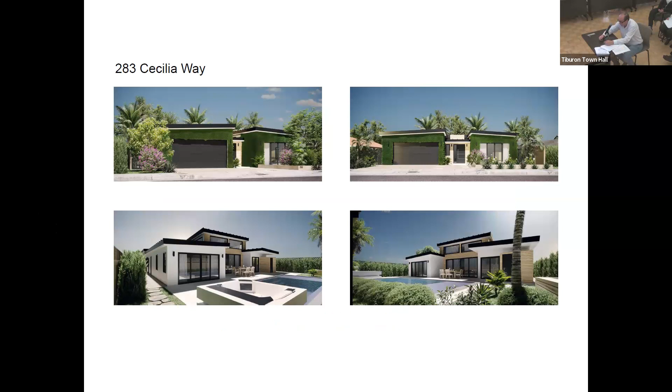At the last meeting there were basically two categories of concerns: one was neighbor concerns, and one were board concerns. So what we're going to try to do is address each of these concerns on an elevation by elevation basis. On June 1st, there were concerns about the shadow of the clerestory peak, which is right here.

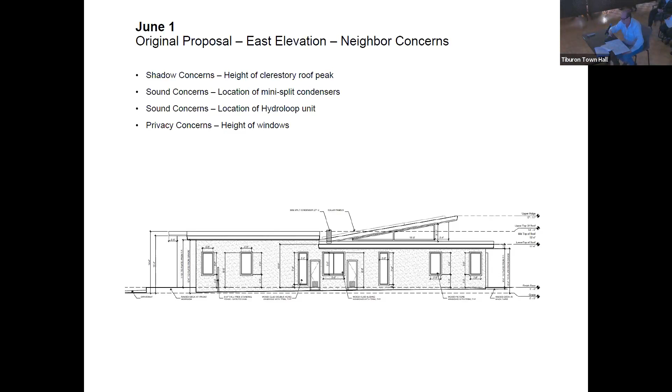The location of the mini split condensers, which is right in the middle - sorry, it's maybe easier over here - and the location of the Hydroloop unit, which was right here, and the height of our windows along the side of that elevation. So we did agree with the neighbors, and we reduced the clerestory peak from 17 foot 11 to 16 feet.

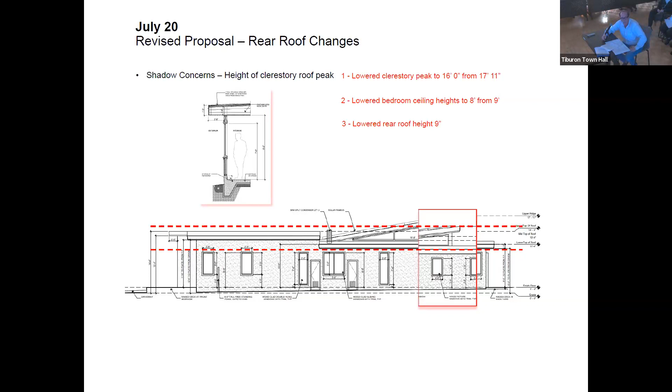If we did that, we'd lose our clerestory windows on the side of the peak, so we voluntarily lowered the roofs in the back 9 inches. We did look at trying to lower them 12 inches, but at the time we were considering using a truss system to do the roof system, and we couldn't go the full 12 inches because we needed that space to build the roof system as planned. So additional changes moving forward on that same elevation side.

There were sound concerns about the mini split condensers, sound concerns for the hydro loop unit, and the height of the windows. We moved the mini split to a location the neighbor had suggested, which was 7 feet 10 inches from the front eave, as illustrated right there.

We lowered the roof heights in the front by 9 inches, not 12, because since we lowered the other roofs 9 inches, lowering the front roofs by 12 would have exposed the sides of the hydro loop and mini split condensers by an additional 3 inches. We thought, since we were using the two roofs as an additional buffer for sound, that would be something they'd want. We lowered all the window heights as requested to 7 feet from 8 feet.

We removed the hydro loop closet from the side of the house. We removed the water heater closet from the side of the house, and we agreed that all the bathroom windows would have privacy glass.

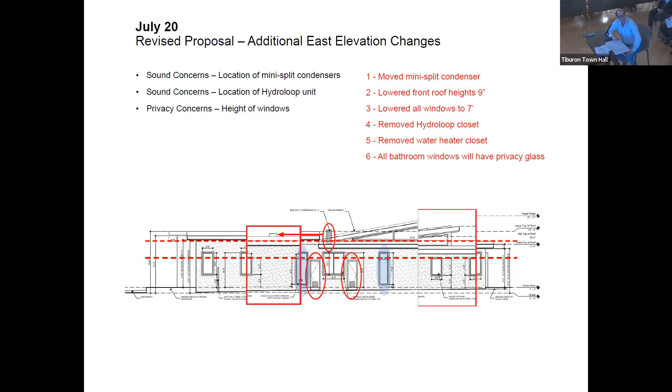So this is the final elevation of the east elevation as proposed today. There was also a discussion about the fence, and the neighbor at 287 said that with the lowered windows at 7 feet, they were satisfied with the 7-foot fence. So this is an illustration of the fence relative to the new house with the lowered windows.

We had the fence surveyed, so this is a surveyed fence line on the plans here, illustrated in yellow, and it pretty sufficiently covers most of the windows.

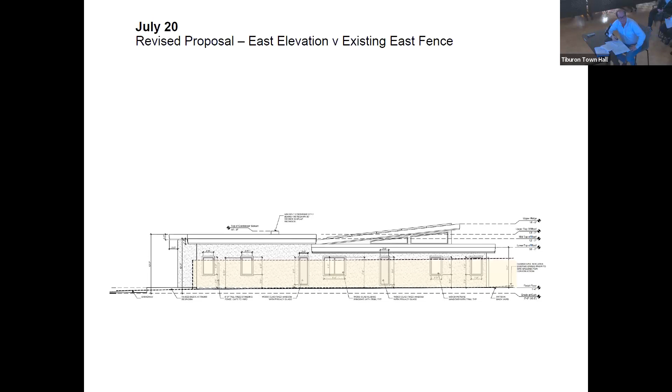There was a comment about the garage and why we need an 11-foot garage. We have an 11-foot garage in our current house right now, but we agreed to lower the garage roof from 11 to 10. We did move the hydro loop into a closet in the garage, in a metal cabinet here. It's not shown here, but it's actually going to be fixed to the wall. We're having a metal cabinet fabricated with insulation around the hydro loop unit.

We don't think it's very noisy, but noises come up a lot, so we're making sure that's going to be insulated. We're going to spend the money to do that. The solar battery units are going to be inside the garage, not on the outside as is most common. They're going to be right there.

As for the electric water heater, we've been putting a lot of things in the garage, and we just haven't figured out exactly where we're going to put the water heater. It's probably going to be an on-demand or some other kind of heater, but we don't know exactly where. It could be in one of our closets for all I know. In my previous house, we used to have it in a unit off the kitchen. So I just don't know where it's going to be right now.

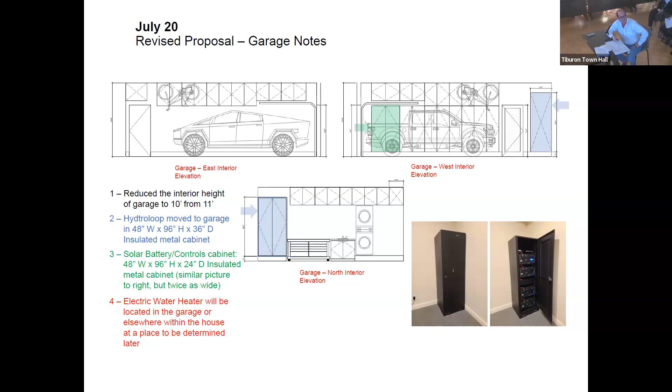We did reduce the entry height from 9 feet to 8 feet. And we talked about this last time, but we're going to have pendant lighting in the clerestory or great room, so there will be no direct light coming off the great room into our neighbors' yards.

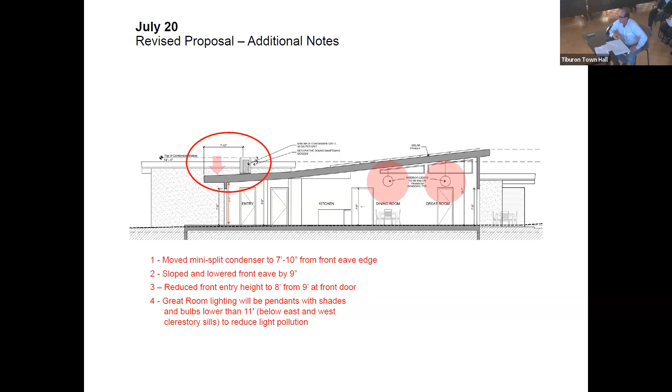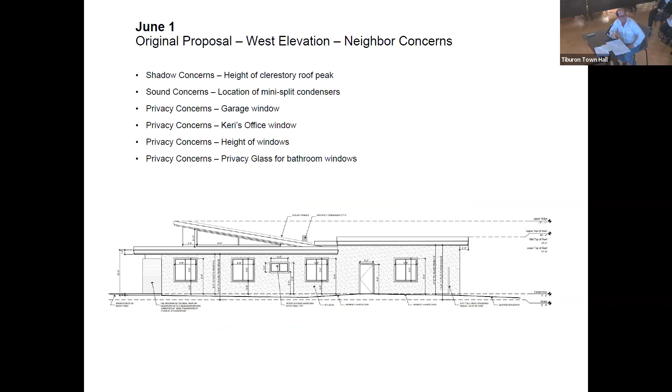So we have reduced the clerestory peak from 17 to 16 feet, as mentioned. The mini split's been moved up to 7 feet 10. We removed the garage window as requested by our neighbors. We reduced all the window heights to 7 feet instead of 8 feet, and we have installed privacy glass, noted on both the bathroom window and the glass window of the garage door, that area there.

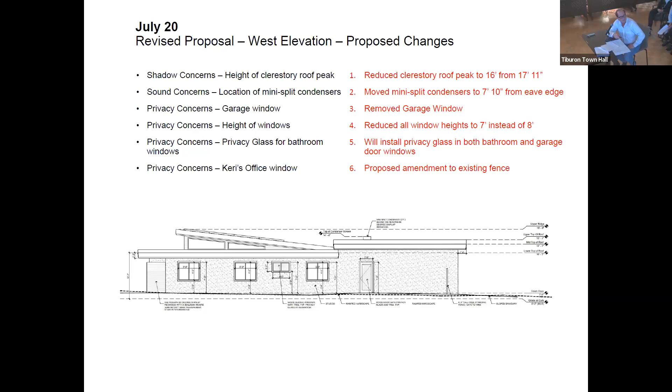We had also proposed an amendment to the fence to address Keri's office window issue. Likewise, we had the fence surveyed, and the current fence looks like this — this is the profile of the fence, and it covers most of the windows, whether we move forward with the fence additions or not.

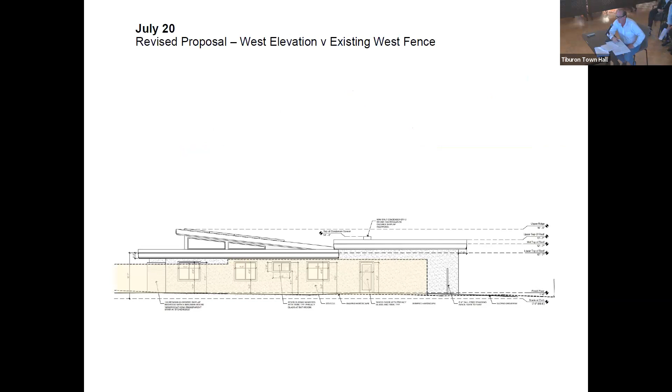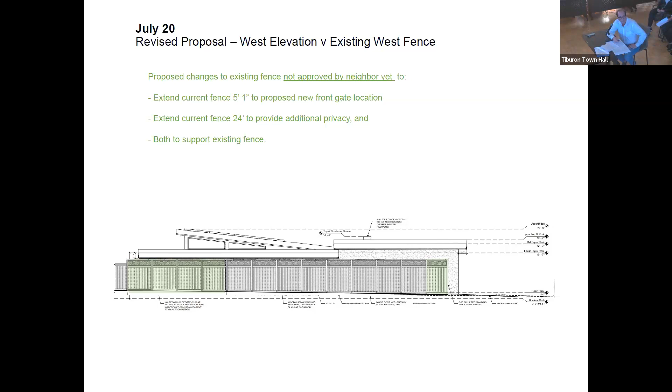So on the west elevation, this is what we had proposed to our neighbor: that we would add this 5 foot 1 inch section onto the front, and 24 feet to the back, because the neighbor mentioned that the current fence has been damaged or is in disrepair. Both the front and back portions would help stabilize it since we're going to use concrete foundations. But my understanding is that the petition for the fence has so far been waylaid because we don't have permission from our neighbor to do that.

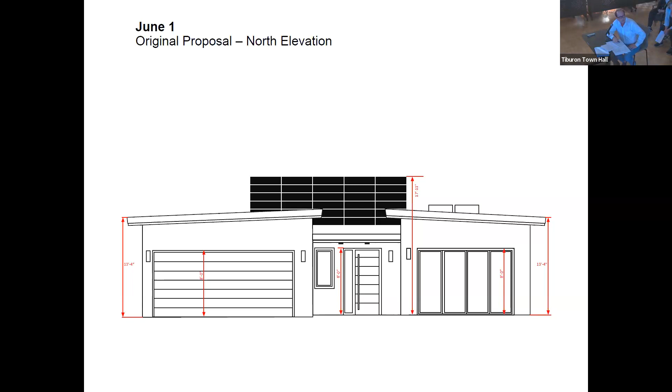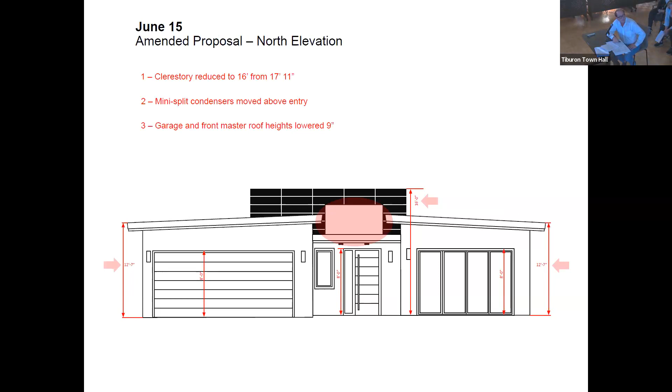On the front, this illustrates our original proposal: a 17-foot peak of the great room with solar panels in front, with 8-foot windows, 8-foot garage, and 8-foot front door. On June 15th, we intended to reduce the clerestory to 16 feet and moved the mini split condensers to the middle as recommended by our neighbors. We also reduced the garage and master roof heights by 9 inches, as mentioned previously.

After a number of comments before the June 15th hearing, we went back and looked at our numbers again. We decided to reduce all the doors, windows, and the garage door to 7 feet from 8 feet. I also mentioned the sloping of the front eave, so we lowered the front eave by 9 inches. And once again, the mini split condenser is moved to 7 feet 10 inches from the front eave, and because it's on that sloped roof, it's further nestled down by 4 inches.

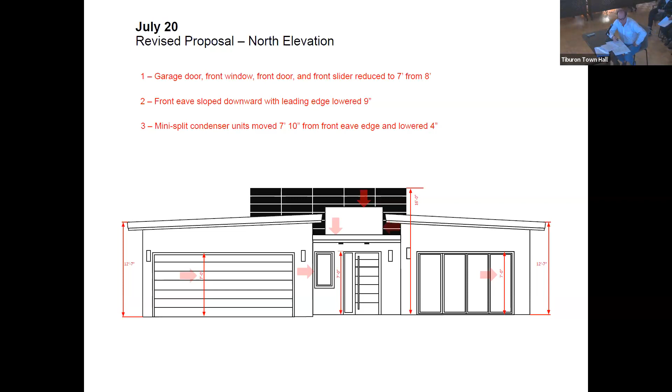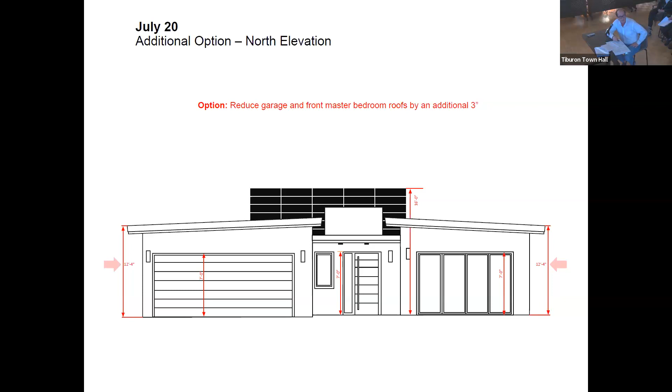Now, if the board believes we need to reduce the two roofs by 12 inches instead of the 9 inches as proposed, we're okay with that. Just understanding that by reducing that additional 3 inches, we're going to be exposing the mini split condenser by 3 inches on either side. But once again, we're agreeable to doing that.

As respects the front landscaping, we added a climbing fig because of Jim Mellott's comments about just another white building. We thought we might add some visual interest by having a climbing fig on the front garage and front master suite, which also breaks up the mass of the two portions of the building in front. But to be honest, my architect hates it, so we're not entirely sold on that necessarily, but it's one solution that we think addresses the concerns.

We added the Chilean mesquite tree in the front, several feet off the front. The intention was to provide immediate shade for the front master bedroom window and some privacy for that room. And then, at the neighbor's request, we removed the larger trees and bushes and landscaping on the southwest corner of the property, including that Japanese blueberry tree.

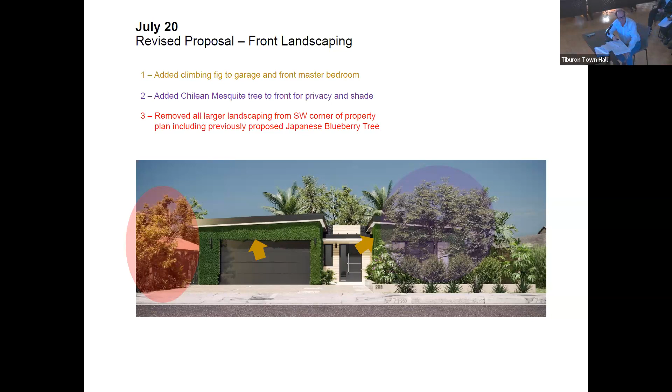With respect to the Chilean mesquite tree, this is where it is in the plan, and this is a picture of the tree we purchased. It's already allowable to have seating underneath the tree. When it matures, the foliage is going to be more lush, kind of like that. Right now it's getting shocked because it's been moved, but when we're ready to put it in, it's going to look beautiful, and it's going to be something people could sit under and enjoy.

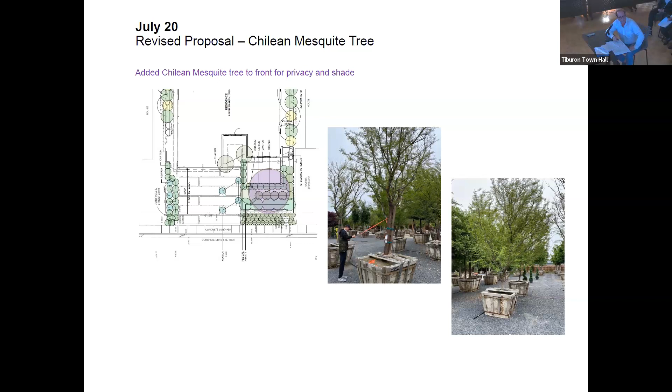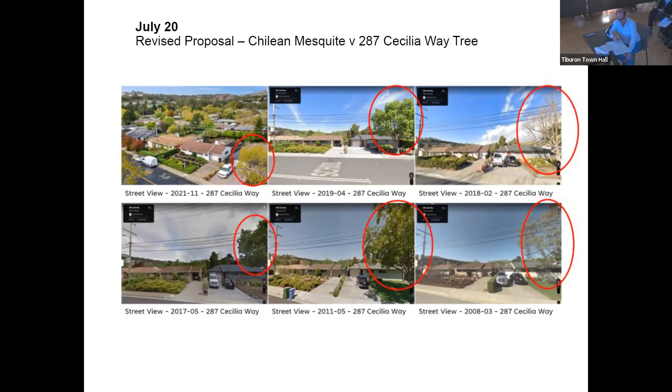There's been mention about the tree and the power lines, and honestly, we're concerned about that like anybody else. But our neighbor's tree at 287 Cecilia Way is immediately under the power lines and has been that way for at least 15 years, so if that was a major concern, I would have thought it would have been brought up some time ago. Still, we are concerned about it, and we picked a tree that, being pushed back from the street, should be sufficient and not touch the power line. So we feel pretty good there.

I have a little bit of a mea culpa here. I don't know who's responsible or whose fault it was, but Jim Fitzgerald brought up a concern about the SP 25 story pole and its height, and questioned it. We went back and looked really carefully, and found two major glaring errors. I don't know what professional did it or what have you, but as the owner of the property, I take full responsibility for it.

There were two errors. First, the elevation in the initial drawings showed the house raised up 1 foot 4 inches from the current grade, which was never the intention. Second, when the story pole diagram went to the engineer, they used 98.6, which was not the original intended number. The original number should have been 99.24.

Let's go over some important elevations. The current house floor is 100, roughly 8.95 feet versus the NAVD. Our intended finished floor is 100.57, roughly equivalent to these two elevations in the backyard. This is the finished floor at 100. The original intended place for our 16 inches was 99.24, in the front of the property. 98.6 exists somewhere in the street, and that's caused a lot of problems for a lot of people.

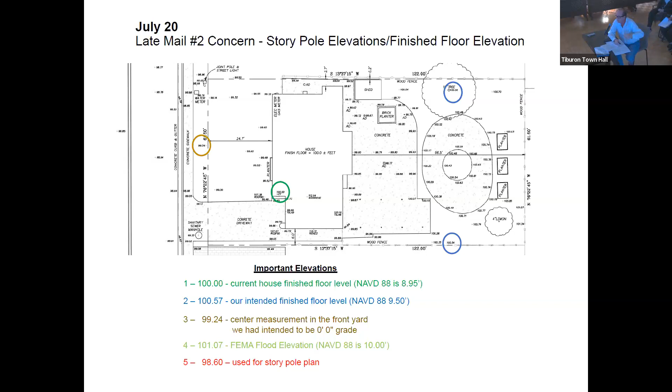The flood elevation, according to our soils person doing our stormwater management plan, is 10 feet. He wrote a letter saying that having it be 9 feet 6 inches, about 6 inches off that 10-foot level, is probably a sufficient compromise relative to flood.

So, mea culpa, we made a mistake, and I'm sorry about that, but our intention is to keep the finished floor at 100.57. I mentioned before that we couldn't lower the back roofs more than 9 inches because of the truss system we were going to use.

So we've abandoned the use of a truss system. We're probably going to stick frame the roof instead, and we're going to make up that elevation difference, basically 8 inches, by reducing the roof thickness and removing the exterior insulation we intended to put on top of the roof.

So we are going to build within the story poles that you saw, even though it's our mistake. We're not asking for it to be moved up or down. We're going to say, hey, this is our mistake, we'll own that mistake, and we'll build it to that level.

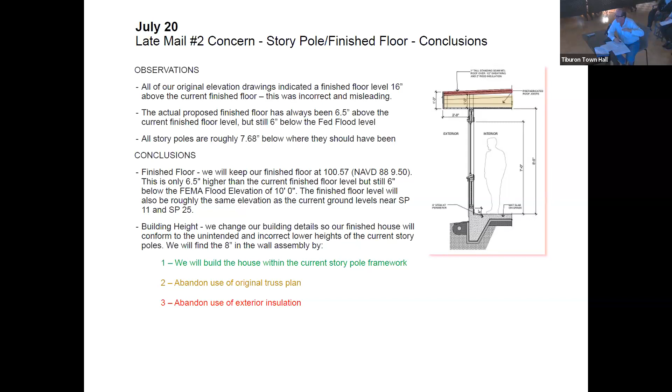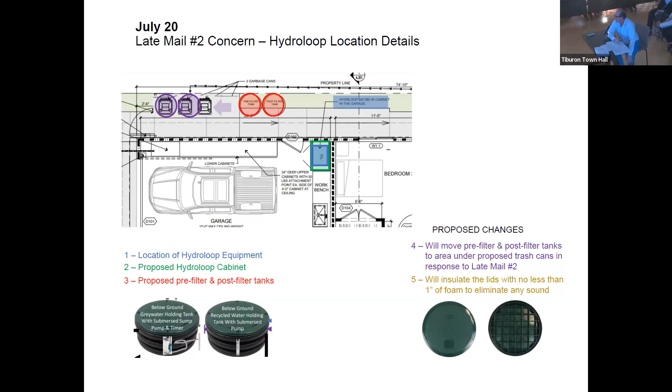So we're proposing moving those tanks under the trash cans, and we're going to insulate those lids with spray foam insulation so they're fully insulated, adding no less than 1 inch of insulation in those 2 lids. We looked at a concrete lid instead, but it won't seal as well as the plastic lids, so for sound, the plastic is actually going to be better, believe it or not.

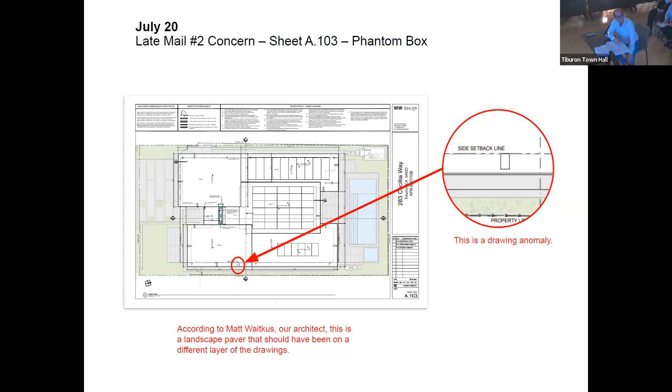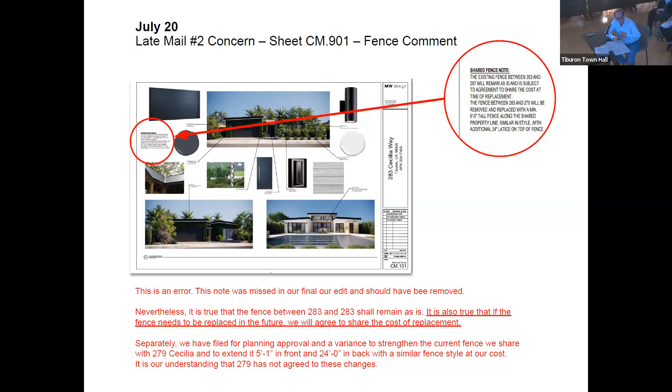And it's our understanding so far that the offer has not been accepted by their neighbor. There's approximately 4 minutes left.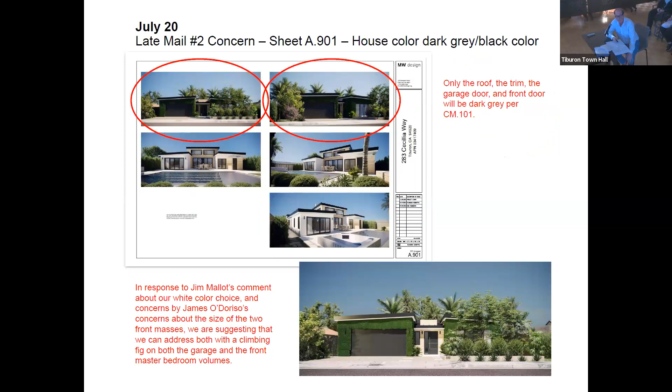Another late mail concern was the color of the house, suggesting it was black. It's not black, there's just a bad color from the image. It's the green for the plant, the foliage that we were talking about putting on for the climbing thing.

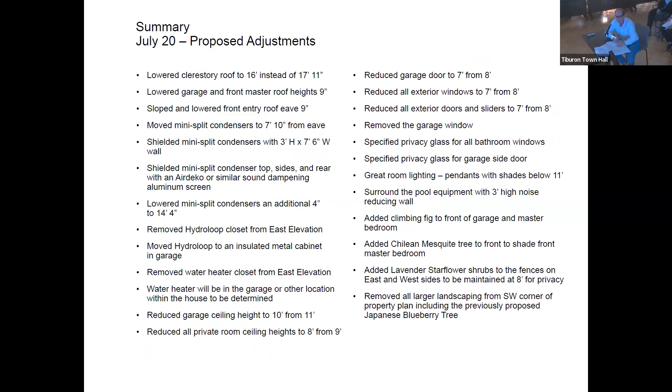In your packet there is also a summary of all the different changes that we've made, and a page talking about some of the things we tried to address that were board-mentioned concerns at the previous meeting: the color choice of the house, the necessity of an 11-foot interior garage, investigating lowering 12 inches. We talked about lowering the two roofs, and we can do that if necessary. We also added something about the privacy of the master bedroom in the front, and the Chilean tree was added for that purpose.

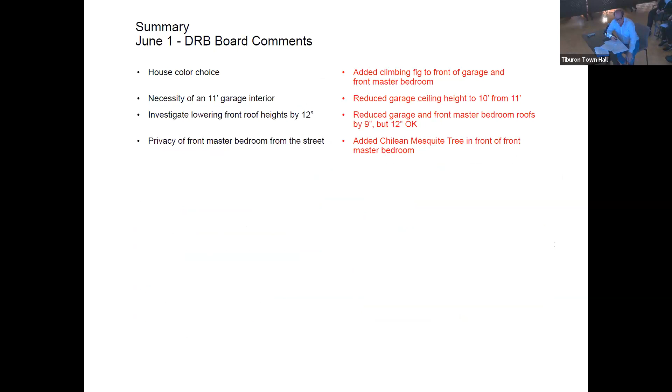Lastly, here's a summary of a bunch of different conditions. There's been a flurry of correspondence between us and the neighbors, and from the neighbors to the DRB, and we've tried to address a lot of those things tonight. We've been changing these plans over and over again to try to address neighbor concerns. Here's a summary of a number of different things we've talked about tonight that we would accept as conditions for approval. And with that, I close.

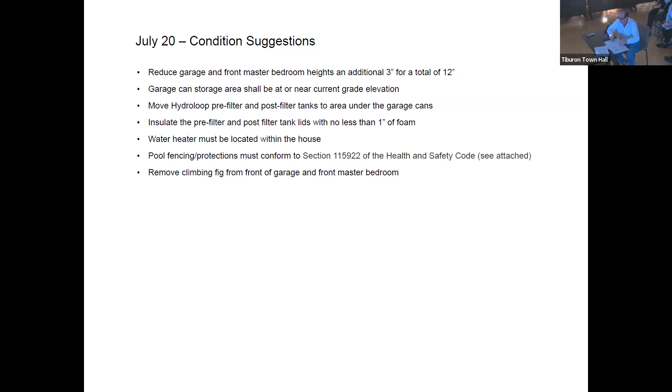All right, thank you. Any questions before we open it up to public?

Have a question, Jim? Yeah, what is the color now? Well, it's still a white house. I know you don't like white houses, but we added the climbing fig to the front. We've been debating whether it'd be the climbing fig or bougainvillea, which is another plant I really like.

What's wrong with coloring it with paint? Color with pink? I'm just not gonna do that, I'm sorry. You said paint, not pink. I mean, the houses on either side of us and in front of us are all colored differently. So I figure, hey, a white house is not out of place with a greenhouse on one side, a mauve house on the other side, and a greenhouse in front of us.

What color is the roof? Yeah, the roof is gonna be black. The top of the roof? Correct, we're gonna use a black stainless steel metal roof, and it's gonna have black trim on the sides. The main reason for that, as we mentioned previously, was to camouflage the solar panels on the roof, as well as the solar water panels on the other roof.

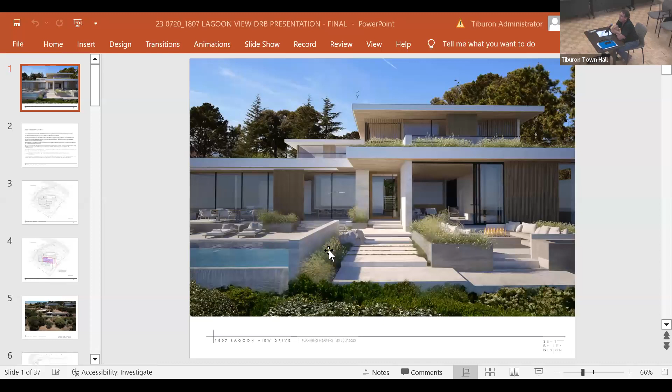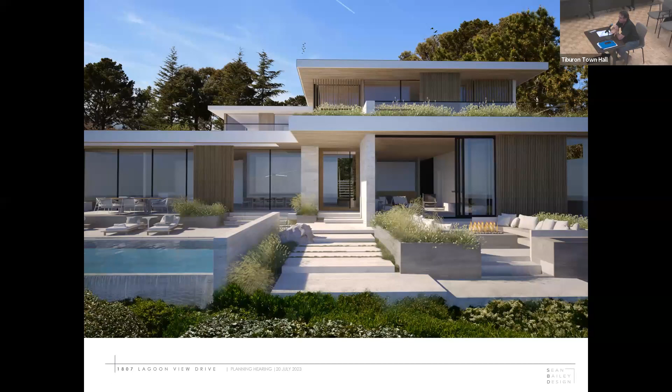My name is Jeff Pastor, and we purchased 1807 Lagoon View. It would be a year ago, September 25th or 26th. The first thing that I did after purchasing the property was go back to a design review board meeting that you had with the previous owner, Mr. Beniars, back in March of 22, so a little over a year ago.

And I watched from cover to cover about an hour and a half of that meeting. I don't know which of you were not on the board at the time, but there was a lot of pushback from neighbors, substantially regarding views, but other issues as well.

So what we did is I went and met with many, many neighbors, some of them multiple times, in order to first understand what their issues were and their concerns and see for myself. Next, we did some designs and talked with some of the neighbors who would be most affected by those and got their feedback and went back and redesigned again.

And then we redesigned again and were ready to submit back in about March of this year. And we had some neighbors who still were not content with what we had done. That's when we got the idea to take the garage and move it underneath the house in order to push the whole house back into the hillside further.

Did you all get to the house at all, or neighbors? Okay good, that'll save us a lot of time. In doing so, we created the need for a variance because now, while the house will be 23 and a half feet out of the ground as it exists today...

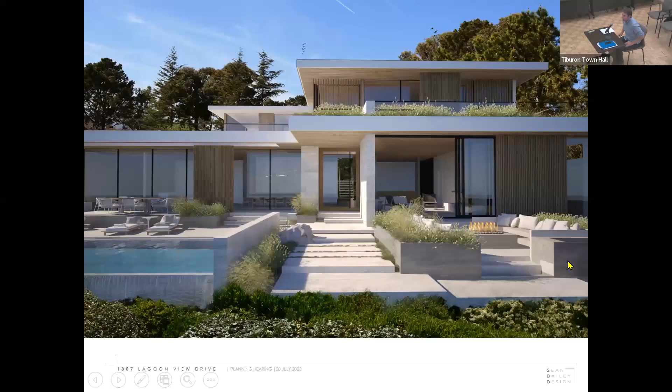I'm going to speed through the presentation, and I always like to thank Christy because she worked so hard to get us here. I brought this project before the board in March 2022. It was pretty clearly back to the drawing board, hearing from both the neighborhood and the board itself. I think the resounding hope was to push the house further to the rear yard because it preserves views for the neighbors uphill as well as the adjacent sides. I believe board member Mallot brought up a fundamental issue with the current driveway and garage—it took up a lot of real estate at the rear of the yard, and we had been clinging to keeping that. So this new design went away from that, as Jeff mentioned, by pushing the garage down.

You may need to turn it on the side. It is on. There we go. Okay, I'm going to skip through this one. Let's go. It's just going back and forth between the first two. Can I just say next slide to you guys? Okay, next slide please.

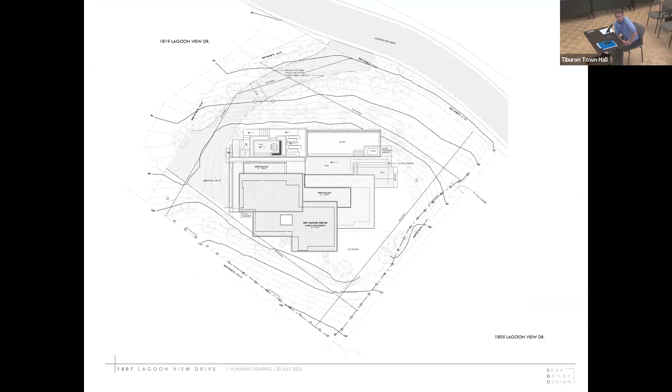The red envelope here represents the current existing house. The purple outline is what we had proposed back in March 2022, and the blue outline is the current proposed upper floor, so you can see how much we pushed it back.

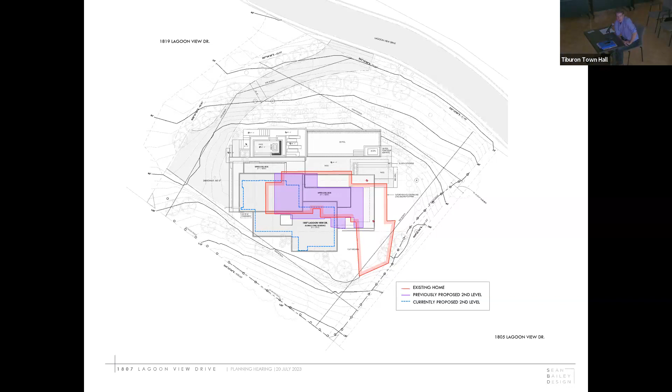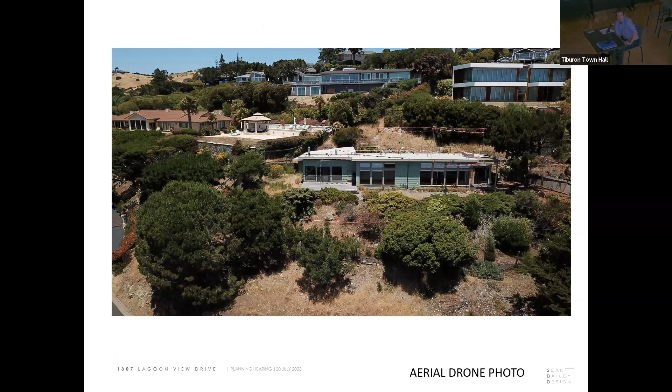A couple quick pictures of the story poles. I think hopefully these show that in context, it's very in keeping with the neighborhood fabric in terms of scale, and hopefully show how much the upper floor terraces back.

Again, the red represents the current house. This level more or less sits in the same area, but it is pushed back a little bit. This level has 1 bedroom, but primarily living spaces that all open up to the patio out front.

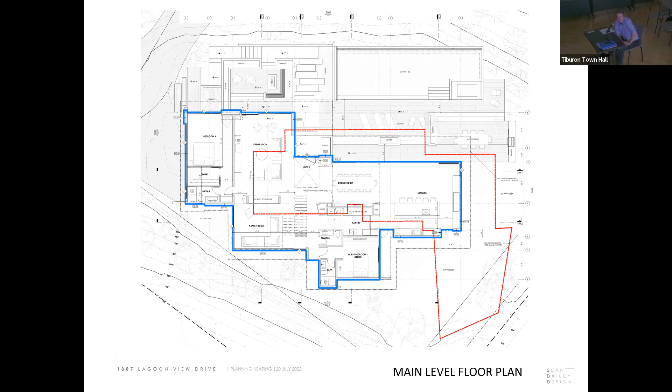Material palette—we're proposing a fiber cement fascia that would be a light gray, a warm gray. There are a couple travertine tile walls that sort of act as accents that bring in the entry, and then some Western red cedar vertical slat walls.

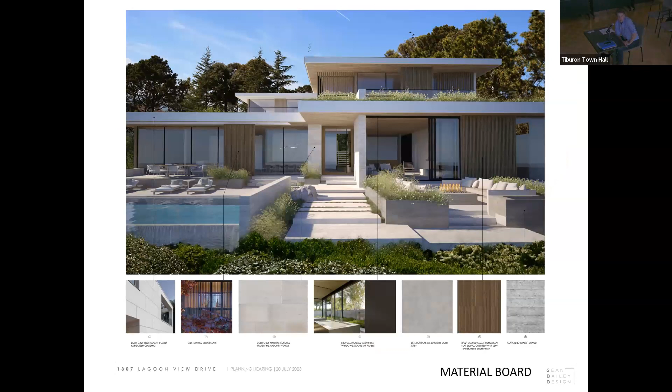I'm going to go next slide. Next slide, please.

Okay, so this is an important one. Jeff spoke on the height limit. We are asking for a variance, which I never like to do, but I think in this case it really allowed us to push the house back, which is a huge benefit to the neighbors. The red dashed line indicates natural grade, and you can see that even with the variance, it's a very small portion of the primary suite that sticks out of that building envelope. The ceiling heights are fairly modest—we're not asking for 16-foot ceilings here. And again, we're digging down to try to help get the overall height down.

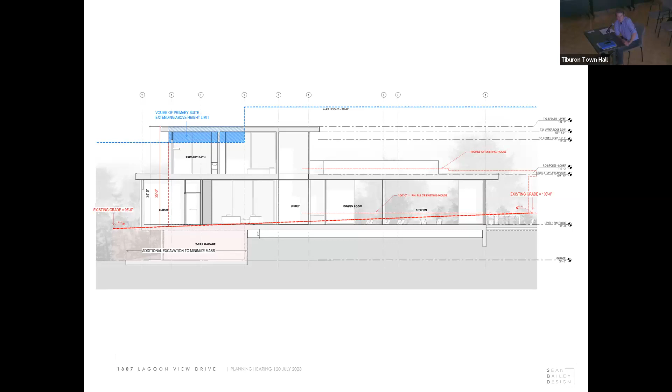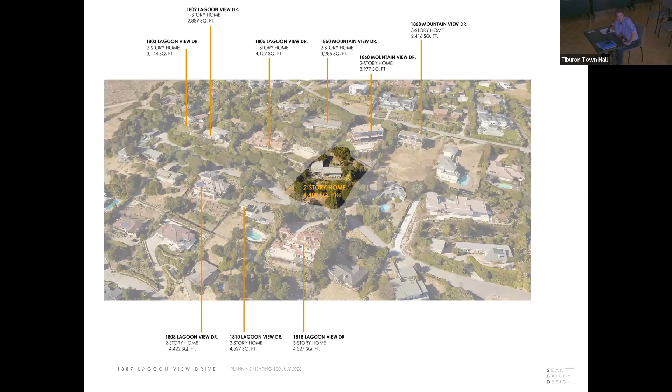Quickly here, this again just shows the neighborhood fabric—plenty of two-story homes of similar size, plenty of pools. You've got about 2 minutes to go. 2 minutes, okay good.

Okay, so 1805 Lagoon View, the Sherwoods—back in the hearing in 2022, to me, and I think to the board, they were the neighbors most affected by the proposed massing. And to Jeff's credit, he understood the process and understood what needed to be done. I believe we have tentatively struck a condition of approval with them.

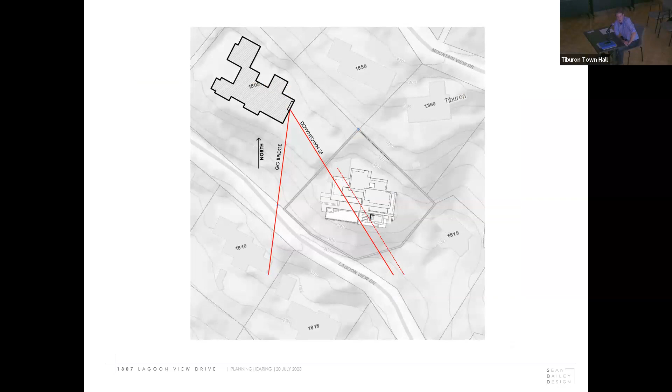But we essentially worked backwards from a view corridor. So we worked with their architect, Brad, and from the back bedroom there, we sat together and picked a view corridor and basically redesigned the whole project around that. So I believe we've gotten to an agreement point with them—you'll probably hear from them tonight. But to me, they were the neighbors that really had a legitimate concern about view blockage, and hopefully we've solved that.

Next slide, please. This shows the light blue was the old massing. You can see it has moved back almost 22 feet. I think it's not a push back 2 feet thing - this was a substantial change from what was previously presented.

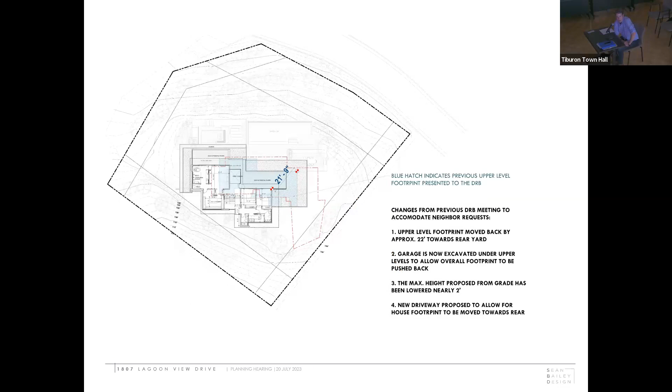Next slide, please. This is if the tentative agreement with the Sherwoods was to push it back 2 feet further at those two lower bedrooms. This is a quick plan that shows that Jeff is agreeable to. Next slide, please.

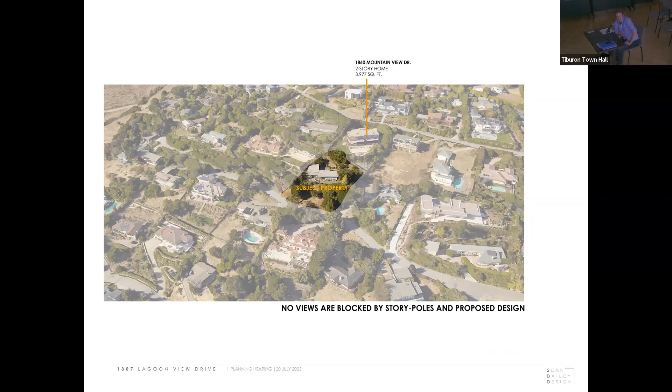1860 and 1850 Mountain View. I suspect you will hear from them. I don't want to dwell on this too much, but there are some photos from each of their properties we'll go through quickly here. Next slide, please.

This is 1860, the lower level. The house sits right behind those trees. There is no view blockage at all.

Next slide, please. The upper level, as Jeff mentioned, I have sympathy for them. There's construction right next to them, but I think it's important to distinguish - this is a roof blocking another roof. The water, the Golden Gate Bridge, the city skyline - there is zero blockage of that.

Next slide, please. Similar 1850, who you'll hear from, have similar concerns. Next slide - you can barely see it here, and again it's not taking out any water line. This is the lower level there. Next slide, please.

And then this again, it is a visible roof, but I think unfortunately that is part of living in this part of the neighborhood. You see roofs, and we're not proposing to block any water view at all. So with that, I'll throw it back to the board, and thank you guys for your time hearing us tonight.

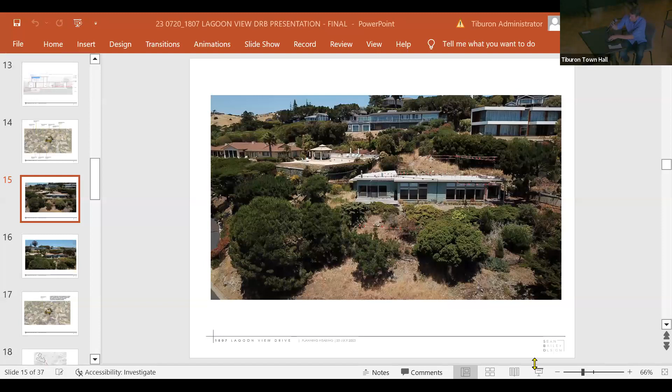I have a question about the roof material. Most of the houses above you are going to be looking down on your roof. And so the quality, color, and content of the roof materials is probably the most important thing visually they're going to see in the house. What is it?

I think if I get you to come back up to the microphone. I've got a question too, so let me just keep you up here for a second. So it's a PVC single-ply membrane roofing, and it's a medium gray color is what we're proposing. It's possible that gravel could be introduced on it as a condition. That would be something to ask Jeff, but I understand the concern. Darker the color, the better. The darker gravel is definitely an option. Darker membrane material. And gravel if you're going to put gravel on it, a darker color in general will go a long way. It would be obviously better off from a reflectivity standpoint for all your uphill neighbors. Okay, understood.

Any questions? That's it. Would you mind just walking us through real quick, ceiling heights, maybe starting with the garage going up, and then there's two right on the top level?

Sure. So garage is 8 feet, we wish it was more, but when you're digging down 8 feet, the whole entire main level, which is the living room, kitchen, dining, is 11'6". And then upstairs in the primary bedroom, that is 11 feet, and the other bedrooms are 8'8".

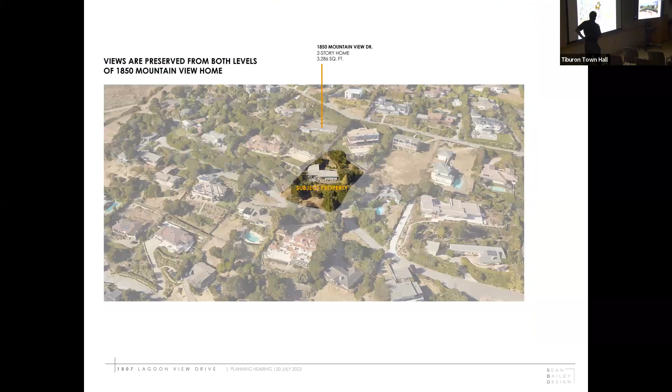Okay, all right. I think that will help you evaluate whether it's bulk and mass or just a roof. I don't believe anything you'd show us from uphill is the issue with regard to bulk and mass of the building. Okay, so from downhill then.

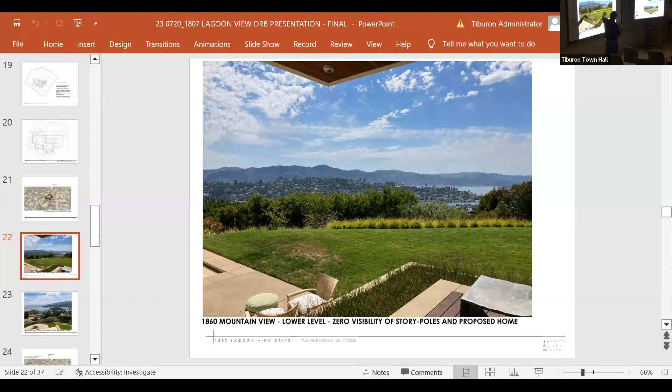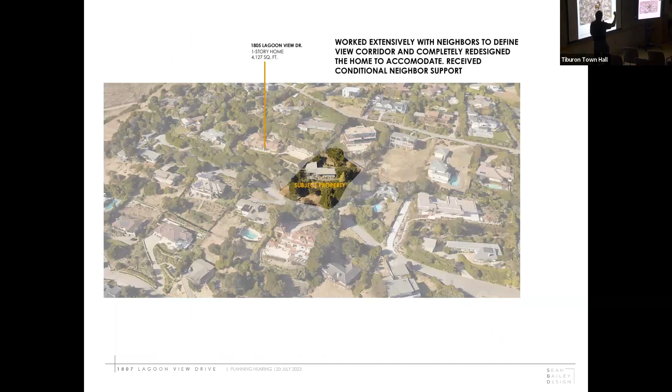Let's go back to the plans that show the story poles looking from Lagoon View from the drone. I'm sorry, the photo, Sean, the photo that showed the drone photos. Okay, hold it. Okay, so what we're looking at is here. Now, I don't know that you cannot see, even now with this, by the angle—you can't tell this from this photo. I apologize, but you probably can't see above or below this level.

So it's not any different from this house, this house, this house, as far as bulk and mass go. And in fact, when we put in—can you go to the landscape plan, please?

Go back right here. So here we have—okay, if you're looking from the street, nobody can see from here because these are tall oaks. Nobody can see from here because of these trees. This is high up above, and nobody can see from here because we have 17 24-inch box trees that are 10 feet tall now that I'm purchasing. They'll sit for 18 to 24 months, depending on when we can get started, before they go in. They'll be 12 to 14 feet lining the driveway. So you will not be able to see a thing from there.

And here are more of them. So those are 20, which I am purchasing, that you can't see up. In addition, there are oak trees here, and we're adding one for a neighbor between them, because there may be—it's not clear yet—a line of sight to a very small sliver of their pool area.

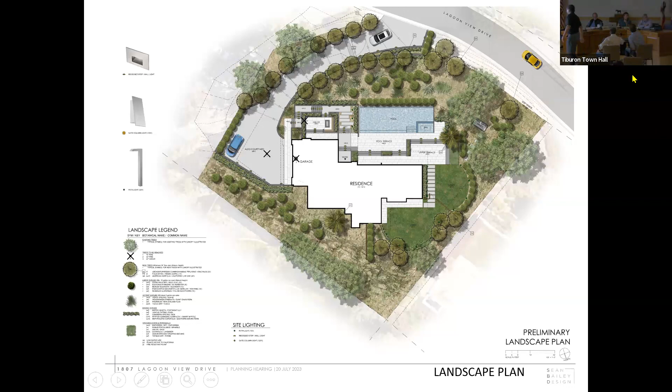Did we have a chance to see the Zack's photograph that was presented? Yes, sure, we can bring that up, and if we could just try to stay focused on just answering whatever questions the board has. I understand you have a project in front of you and you're going to make your statements—nothing wrong with that, I understand. I'm not saying you weren't. I'm just trying to keep us focused.

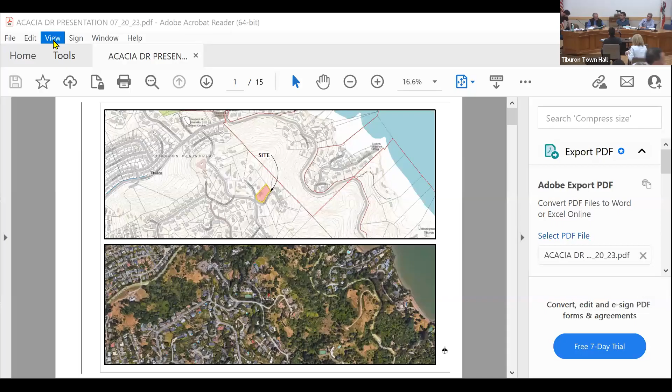Good evening. Good evening. My name is Jared Polsky, and I'm here with my associate Kathleen Heberman. We're Liz and Yale's architects, and we're also here with John Merton, our landscape architect, and Glenn Dirth, our civil engineer.

We could go through the slides, they're really part of your package. First of all, we're not asking for any variances. No setbacks, no height limit, no floor area, no coverage variances, and the house is designed to current planning codes.

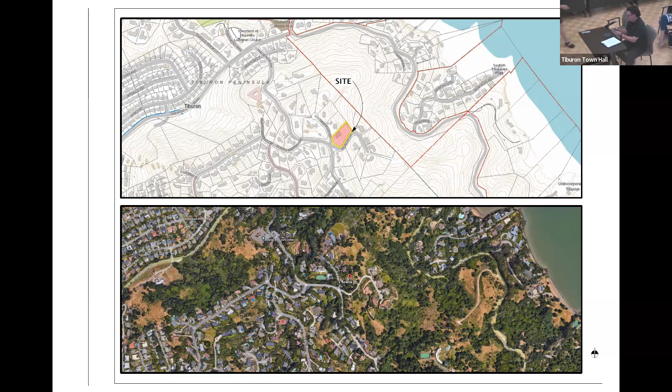Maybe we could look at the 3D. Can I move the clicker? There, and maybe you can try if it works. Which way? Oh, back, but makes no sense. This down arrow, that goes actually forward. Okay.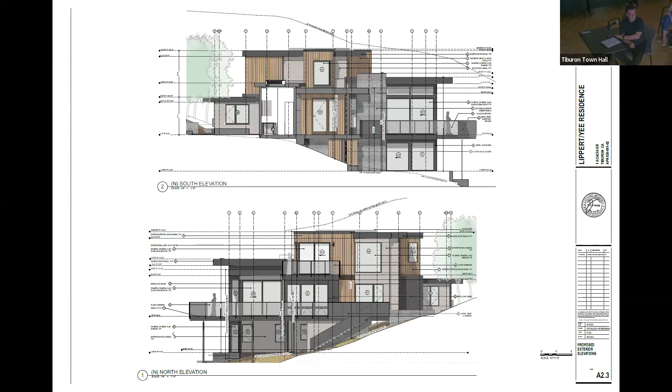I just want to go quickly through the images. Probably the best image is the 3D projections, from the offsite views. No, I can't read.

We followed the hillside design guidelines. We've broken up the massing. We've used horizontal elements that terrace on the hillside to integrate the building with the site. We set the second story 23 feet back from the edge of the first floor and 7.5 feet back from the side of the first floor, again following the design guidelines. So the upper floor is back 23 feet from the lower floor and in 7.5 feet from the side, so it's stepping in like the design guidelines for hillside development suggest.

We're proposing a variation of materials and finishes that highlight the massing and the articulation of the massing. We think the design fits in well with current development trends, somewhat, I guess, a little bit like what we talked about earlier. A scheme with a contemporary styled home. We feel it's compatible with the other hillside homes in Tiburon.

Yale and Liz and Kathleen and I met with the adjacent neighbors who live right here, the McCombs, at 1010 Field Road, early in our design process. We visited their house, we showed them our 3D models. We have a 3D computer model of the design, and they were in full support.

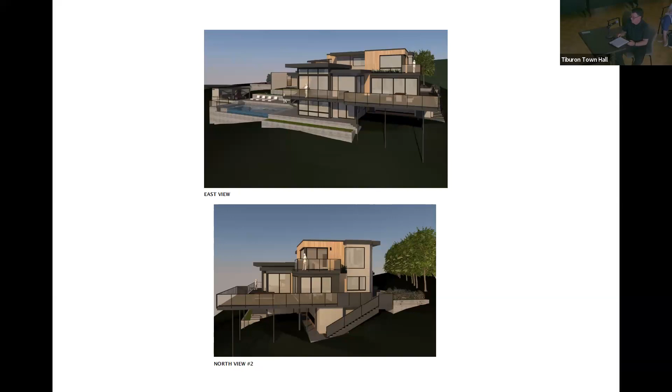Is there any questions? Nope. Nope. All right, with that, we'll get plenty more time, but we'll open it up to public to see if there's any comments, and then bring it back up if we have any questions.